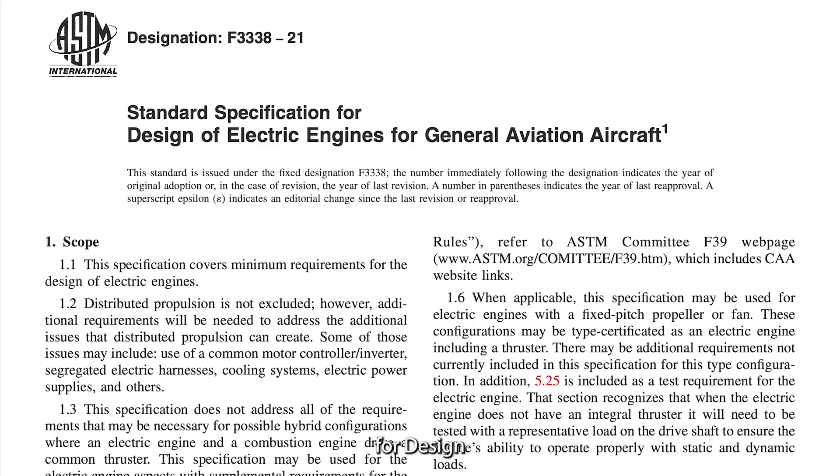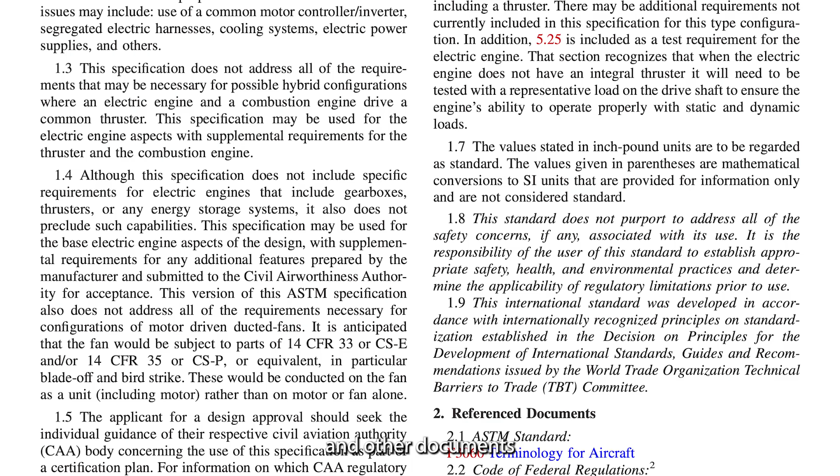As with typical ASTM standards, the first three sections of ASTM F3338, the standard specification for design of electric engines for general aviation aircraft, are always scope, reference documents, and terminology. Scope and reference documents have a list of standards and other documents that cover additional information on the topic. The terminology section contains terms and definitions.

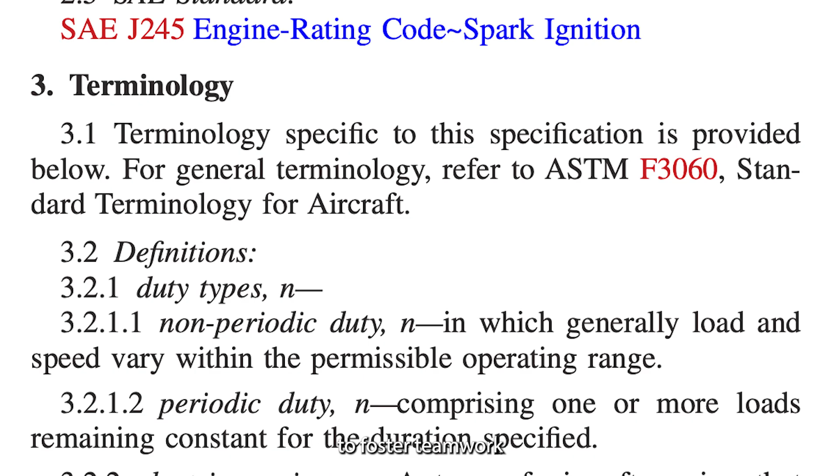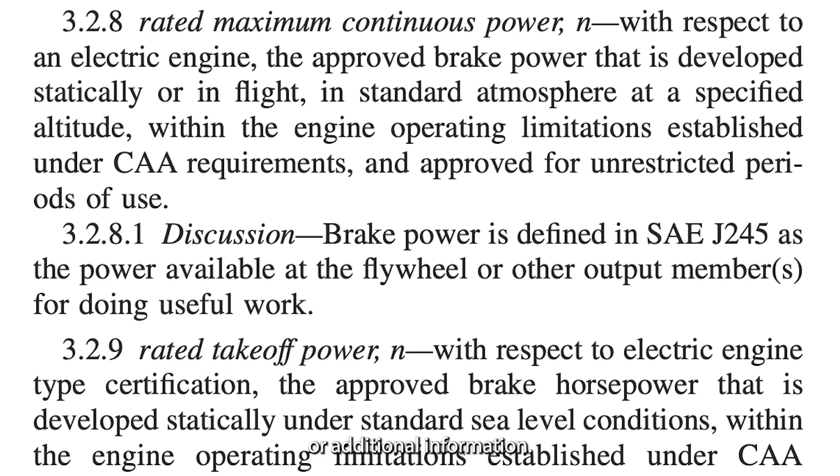It is important that all personnel in the aviation industry use a common meaning to foster teamwork and avoid confusion. This section is divided into 12 parts that identify terms and their meanings. It may include a discussion of some terms or additional information. The full standard for definitions related to airworthiness design standards is ASTM F3060, Standard Terminology for Aircraft.

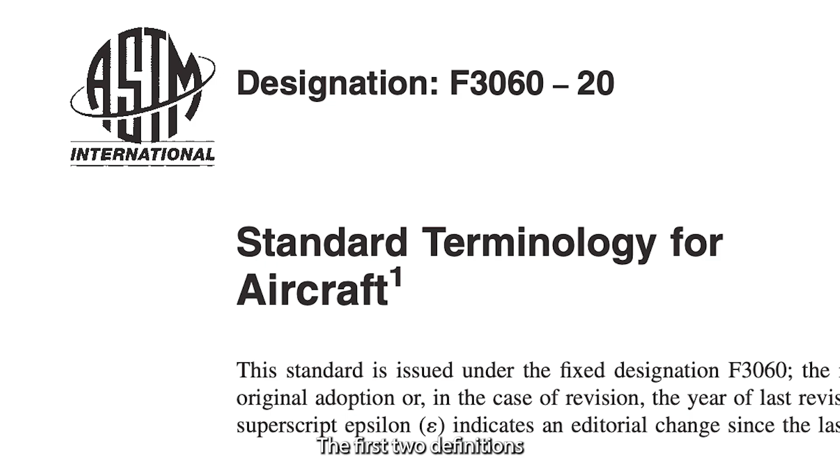The first two definitions we'll cover are electric engine and motor. This is to establish a common understanding of the terms and the difference between the two. An electric engine is a type of aircraft engine that converts electric power into mechanical power or thrust used for propulsion, including those components necessary for proper control and functioning. A motor is a machine that converts electrical power into rotational mechanical power.

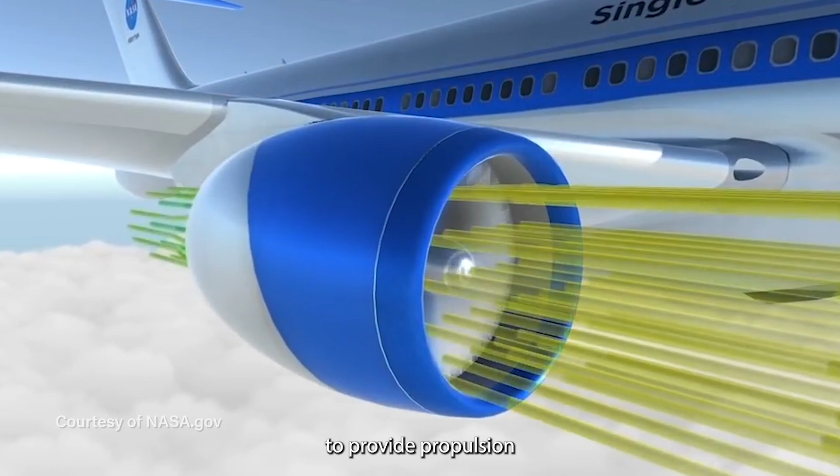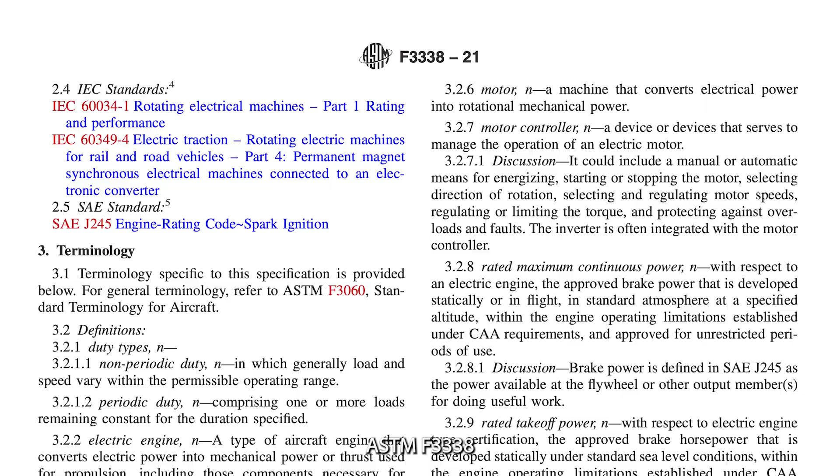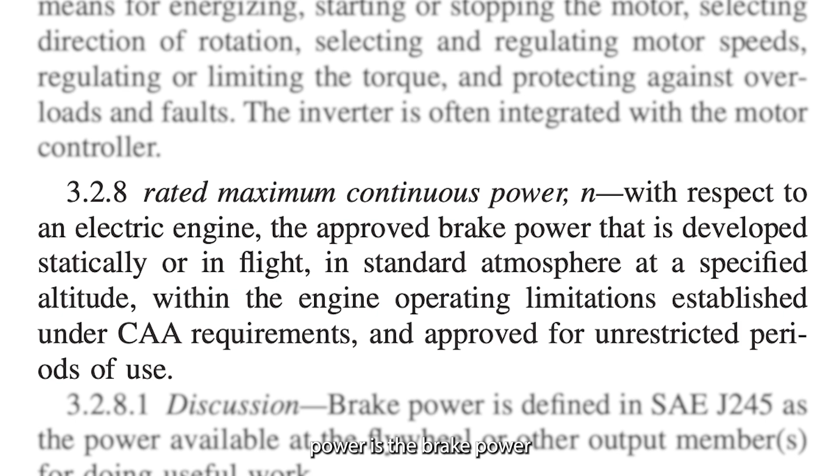An electric engine is used to provide propulsion to an aircraft, but a motor is any electrical machine that converts electricity to rotational power, such as motors for the extension and retraction of landing gear. ASTM F3338 defines two different types of rated power: rated maximum continuous power and rated takeoff power. Rated maximum continuous power is the brake power available at the output for unrestricted periods of use.

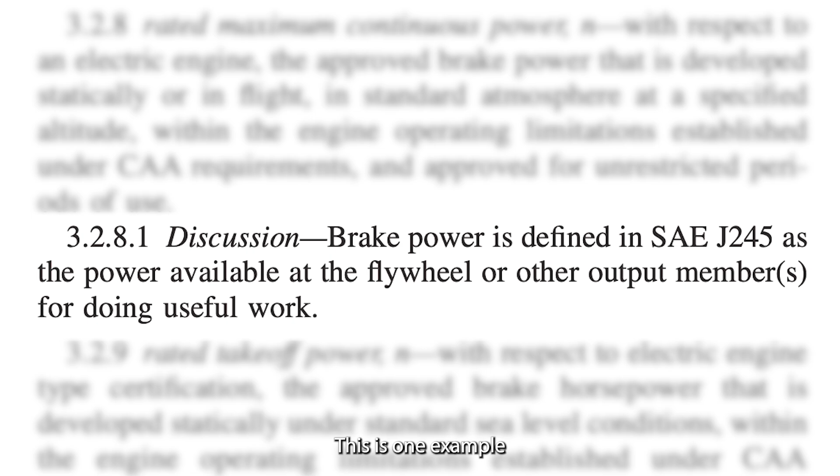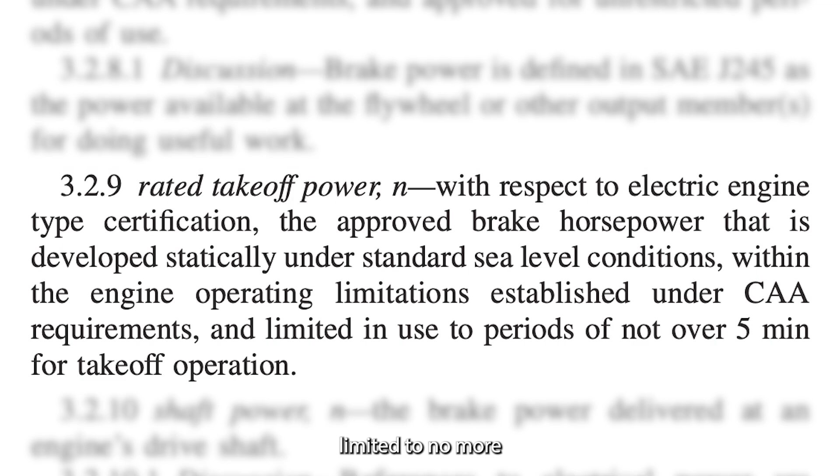Brake power is defined in SAE J245 as the power available at the flywheel or other output member or members for doing useful work. This is one example of the many times that this standard calls out other standards. Rated takeoff power is defined in ASTM F3338 as the power needed at takeoff limited to no more than 5 minutes. Next, we discuss the definitions for two different duty types.

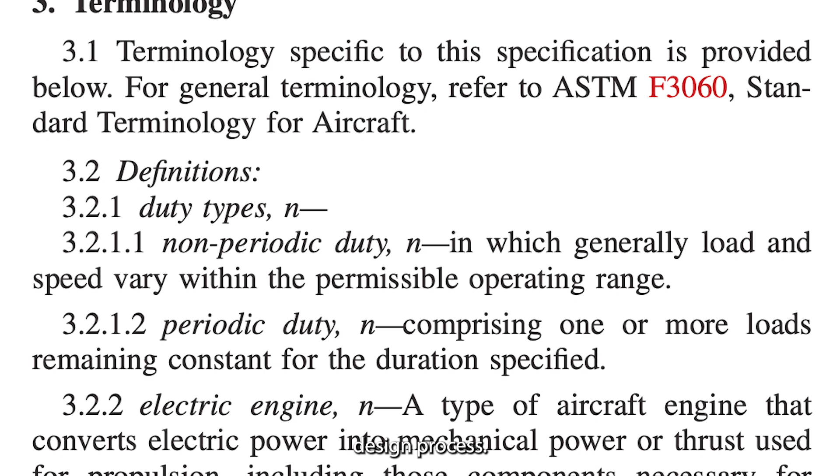The difference in these terms is how the load behaves in the operating range versus the duration. These are foundational terms that establish design requirements that are critical throughout the design process. The first term is non-periodic duty. This is when the load and speed vary while in the operating range. An example is the operation of a constant speed propeller that adjusts pitch during flight.

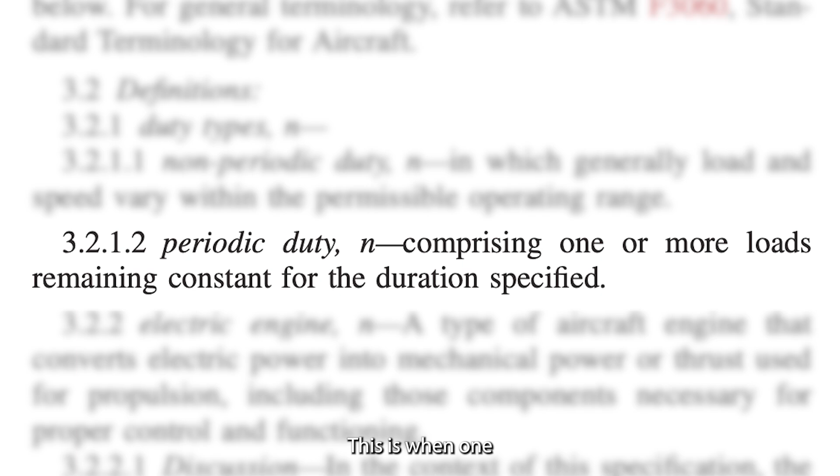The second term is periodic duty. This is when one or more loads are constant for a specified duration. De-icing boots on a propeller are an example of periodic duty, since they operate on a specific cycle that doesn't vary during operation.